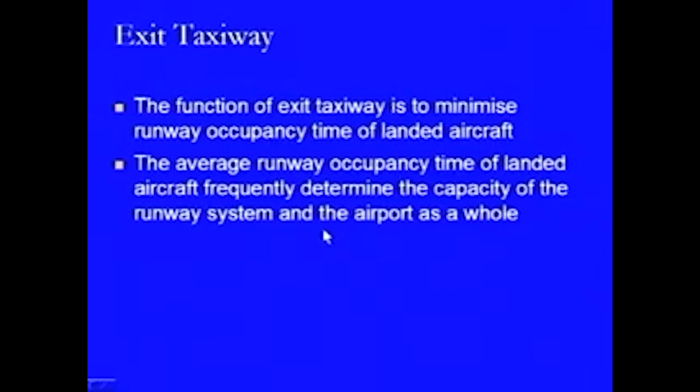The average runway occupancy time of any landed aircraft frequently determines the capacity of the runway system, and not only the runway system, but also the overall capacity of any airport. This is obvious, because if an aircraft takes more time at landing before reaching the terminal apron, no other operation can take place on that runway strip. This reduces the overall capacity of not only the runway strip but also of the airport. That is why average runway occupancy time is an important factor, and it must be measured and optimized to be as minimum as possible.

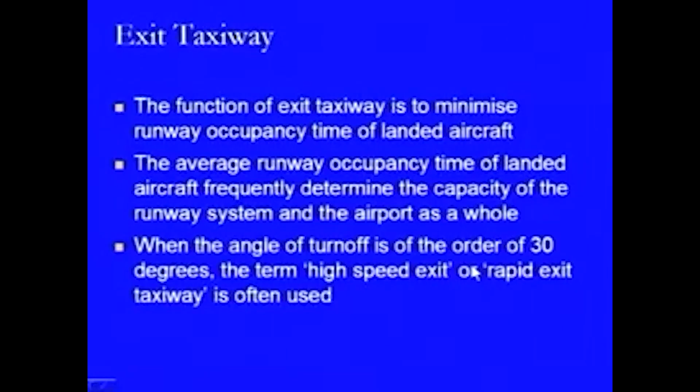When the angle of turnoff is of the order of 30 degrees, the term high speed exit or rapid exit taxiway is used. This depends on at what particular angle the exit taxiway is provided. If it is provided at an angle of around 30 degrees, the turn can be taken at higher speed, and that is why it is called a high speed exit or rapid exit taxiway.

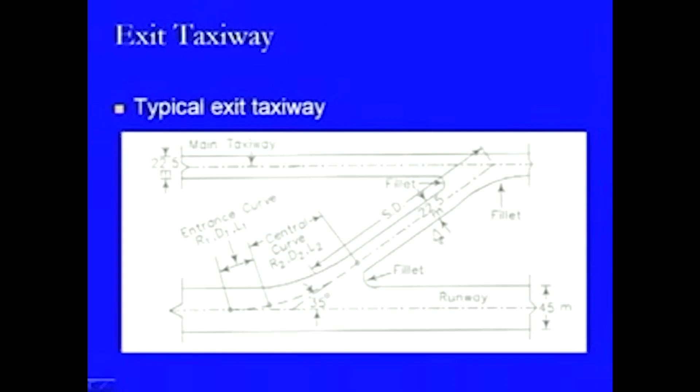So these are some design features which have significance in the design of any exit taxiway, and we will be looking at all these design features and the computation of these design parameters.

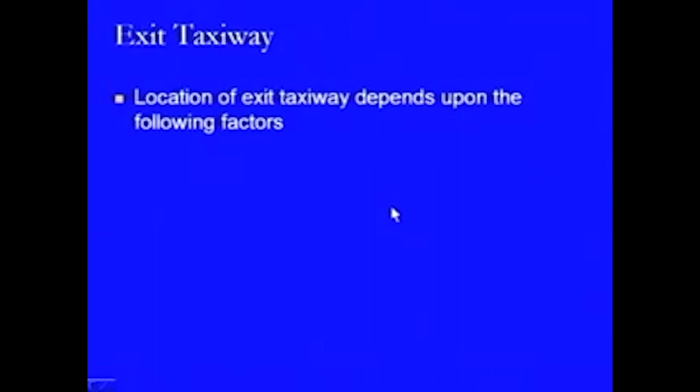Now we first look at the conditions which define the location of any exit taxiway. There are certain factors on which this may depend, such as for large and small aircraft we may require different initial exit speeds. That is one particular condition known to us.

This depends on the type of propulsion power provided on any aircraft. If the aircraft is big enough, the power will be more, and therefore the speed with which it will be landing will be more compared to smaller aircraft. Therefore, we have to look at the exit speed of different types of aircraft which will be using that airport and the exit taxiway.

Then there is a touchdown distance at which the aircraft will be touching the pavement surface when it is coming along the flight path and descending on the runway strip. This touchdown distance from the runway threshold and the runway occupancy time both need to be determined, and they will be dependent on the approach speed with which it is crossing the threshold and the touchdown speed. These are the two values which are the important factors defining for how much time period an aircraft is going to remain on the runway strip.

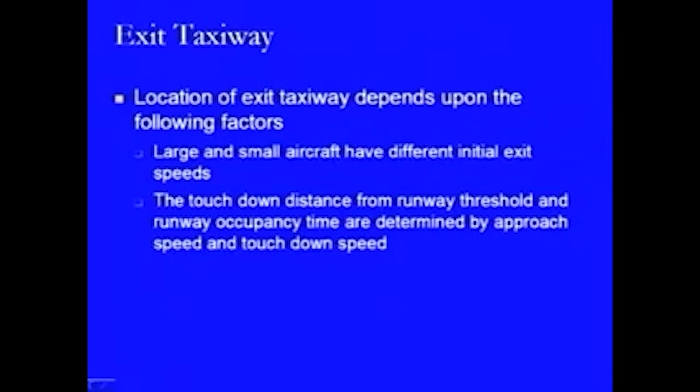If the aircraft is crossing the runway threshold with a smaller speed, then it will be touching down a little early, or may touch down at the pre-specified point, but then it will be coming towards the exit taxiway location with a smaller speed, and therefore there is more occupancy time in this case. Whereas an aircraft coming with a higher speed at touchdown will be moving with that same higher speed, and therefore the occupancy time will remain lesser. So that is another design parameter which creates its effect on occupancy time.

Then another factor is the rate of deceleration, which is also dependent on certain parameters like the pavement surface condition. Within this, it may be a possibility that it is in wet condition or dry condition. On both these conditions, it has a different coefficient of friction which creates this effect at the time the aircraft is trying to decelerate, as the pavement surface provides some resistance in the opposite direction. Obviously, in the dry condition, the coefficient of friction will be more compared to the wet condition, so in that case the rate of deceleration will be more, and the aircraft can be brought to a desired smaller speed earlier compared to a wet condition.

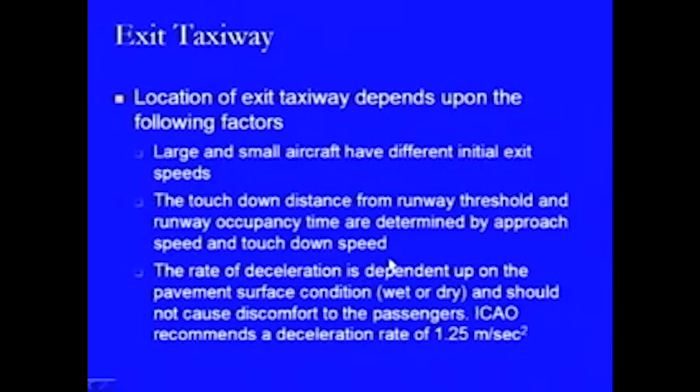Further, there is another factor - the size of the airport. If there is a large airport, there may be as many as 3 angled exit taxiways for each landing direction, in addition to several 90-degree exit taxiways. So it depends - if it is going to be used by a large number of aircraft with much more frequency of landing, then we require a number of taxiways, and these exit taxiways may be angled taxiways and 90-degree taxiways provided together. So that is a combination which needs to be provided.

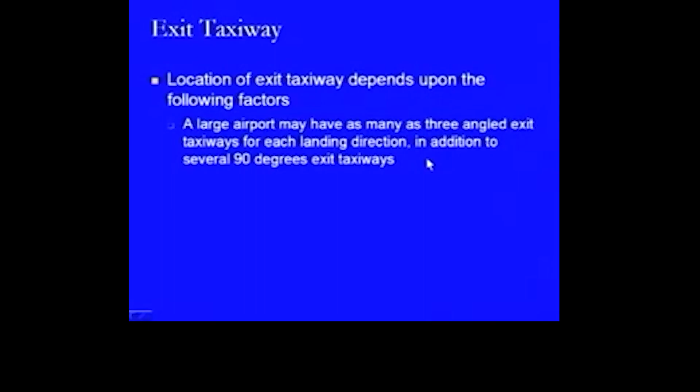What it says is that other than the 90-degree exit taxiways provided, there should be 3 angled taxiways for each landing direction. Now, the 3 angled taxiways will be spaced at different distances along the runway strip, so that they can take care of different types of aircraft with respect to the propulsive power with them, and the efficiency or rapidity with which those aircraft can be taken away from the runway strip towards the main taxiways.

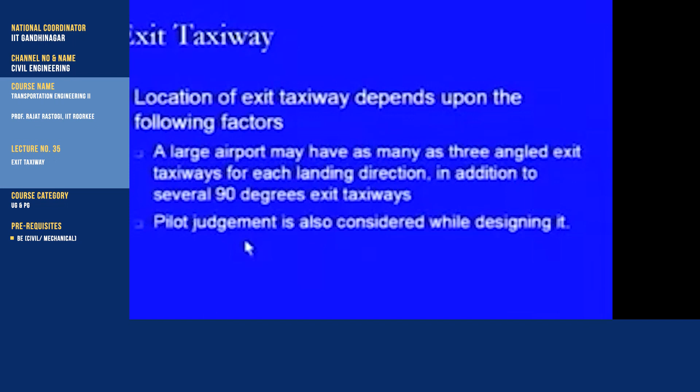While designing or locating these exit taxiways, another factor taken into consideration is pilot judgment. At times the pilot judges by themselves that they have reached a speed by which they can now take a turn and move towards the taxiway. So after what particular time interval that is being felt, on the basis of that the exit taxiway can also be located along the runway strip.

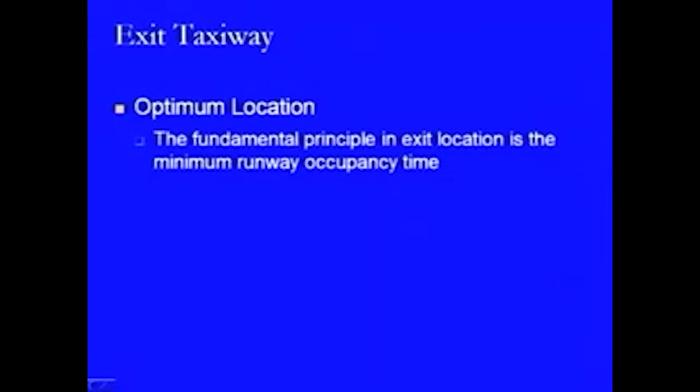Now, once we are talking about the location of any exit taxiway along the runway strip, one thing which can be looked upon is the optimum location of that exit taxiway. In this case, the fundamental principle remains that it should have the minimum runway occupancy time, as we have discussed before. The runway should be occupied for as less time as possible per landing, so that remains the fundamental principle.

So we have to locate it such that delays are not there. Further, it is dependent upon the acceptance rate of the runway with the taxiway system and the arrival rate of aircraft. These are some other factors which govern whether we are having the optimum location or not.

What it tries to say is that there are two things happening. One is that the runway system is having the arrival rate of the aircrafts. On the basis of the number of aircrafts which are going to land at that airport, there will be a specified arrival rate at which these aircrafts will be coming.

And then there is another rate known as the acceptance rate of that runway. Acceptance rate means whether the runway is in a position to take an aircraft approaching this airport, and this depends on the overall capacity of the airport and the provision of taxiways by which the runway becomes empty. When there is no other aircraft on the runway strip, then the next aircraft can utilize it for landing.

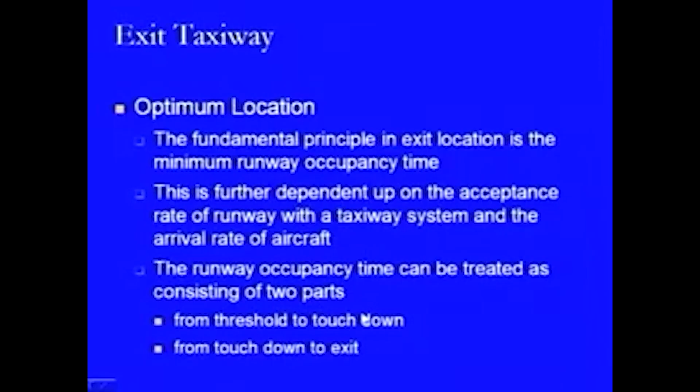This is controlled by the speed with which the aircraft is crossing the threshold, and also by the touchdown speed and the speed of exit. So these are the two speeds, that is, speed from threshold to touchdown. We will be taking three speeds into consideration in that sense.

So if we want to compute the distance from the runway threshold to the exit speed condition, it will be given by SE, the distance for the exit condition or distance for the exit taxiway, equals STD, where STD is the aircraft touchdown distance - that is, once it has crossed the threshold and touches the pavement at some point, the distance covered between those two points - plus VTD squared minus VE squared, divided by 2A.

Here VTD is the aircraft touchdown speed, the speed at which it is touching down the pavement surface, and VE is the aircraft exit speed at which it is coming out of the runway strip. And A is the average runway deceleration rate from touchdown to the exit speed.

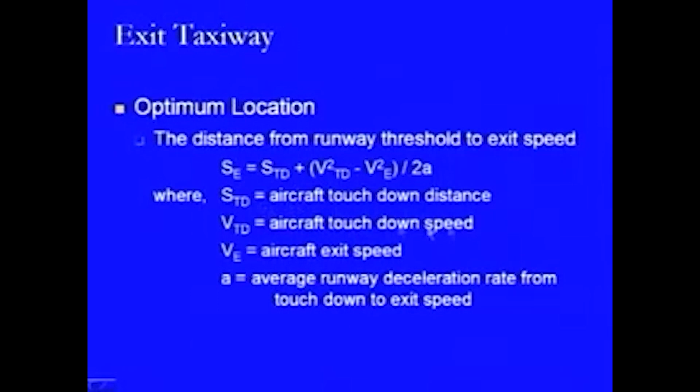On the basis of this value, the aircraft touchdown distance is known most of the time, because it is defined that for this type of aircraft it is going to touch at this position based on its flight path and based on its speed crossing the threshold. So this is generally known, and this value can be taken directly. Otherwise, this can also be computed on the basis of the speed of the aircraft at the threshold point and the speed of the aircraft at the touchdown point. With respect to those two speeds, we can compute the value.

This occupancy time, which we have been discussing, from the runway threshold to exit speed consists of the flight time from the runway threshold to touchdown point. Previously we saw the distance being moved, which is the overall distance required for locating the exit taxiway. After reaching that particular distance, the exit taxiway can be provided at that location, which will probably be the optimum location for that aircraft.

Another thing we are interested in is minimizing the occupancy time, and in that sense it is going to consist of the flight time from the runway threshold to the touchdown point. That is the one aspect, as we have discussed.

Another thing is the time required for the nose gear to make contact with the pavement surface. When the aircraft touches down, it is the main gears, provided below the wings, that touch the ground first. Once they have touched the ground, slowly the nose gear touches the ground. So there is some gap in this whole movement, and this is usually 3 seconds.

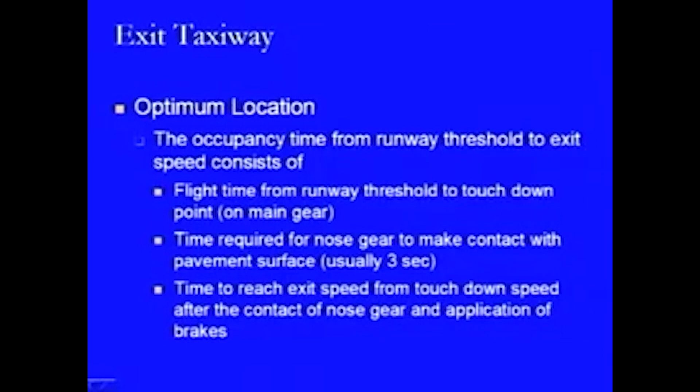So we have to take this 3 seconds into consideration, and then there is a time to reach the exit speed from the touchdown speed. There is a change from touchdown speed to exit speed, where the exit speed is lower than the touchdown speed, and that happens after the nose gear has contacted the pavement surface and the brakes have started being applied. So we are looking at this changeover.

Another is the time required for the aircraft to turn off onto the exit taxiway and clear the runway, approximately taken as 10 seconds. So we have two constant values, 3 seconds and 10 seconds, and in between those we have certain time periods which need to be computed on the basis of the speeds.

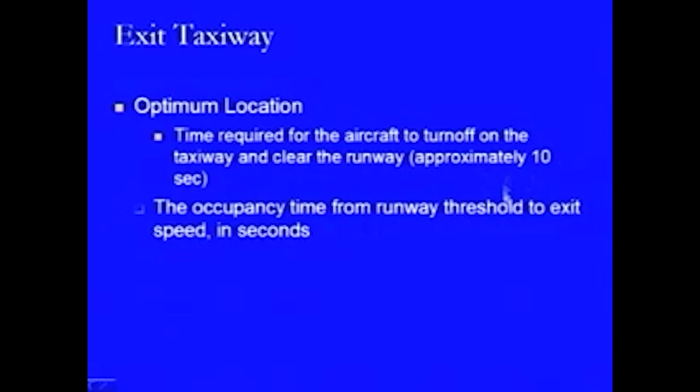Therefore, this runway time from runway threshold to exit speed, in seconds, can be given by: occupancy time equals STD divided by half of VTH plus VTD,

and this whole is being added to 3 seconds, the time taken by the nose gear to touch the pavement surface, plus the change in speed from touchdown to exit, that is VTD minus VE divided by A, the deceleration rate, because the brakes are being applied so as to reach this value of VE, plus 10 seconds given so that the aircraft can take a turn, turn off, and come towards the taxiway.

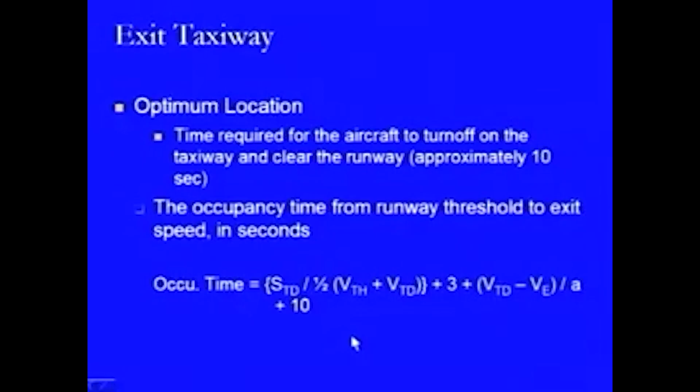So that is the overall time period to be considered, and this time is the occupancy time of any runway strip, and this needs to be minimized.

Now we are looking at the concept of optimum location, which, when we were discussing the various factors earlier, we came across two different types of rates that govern how we can find the optimum location: the average occupancy rate, acceptance rate, and arrival rate. The arrival rate is the rate at which aircrafts are reaching any airport, and the acceptance rate relates to the runway strip and its ability to accept the aircraft for landing.

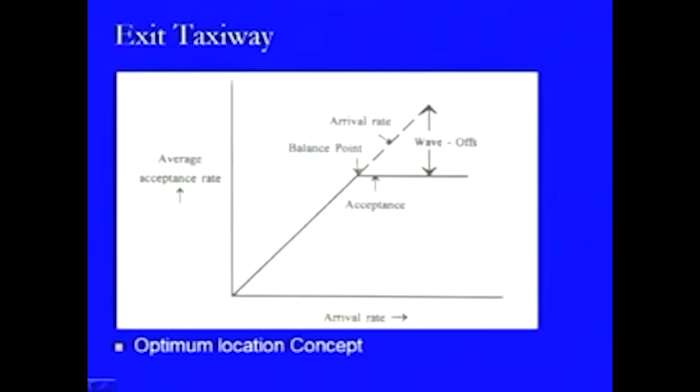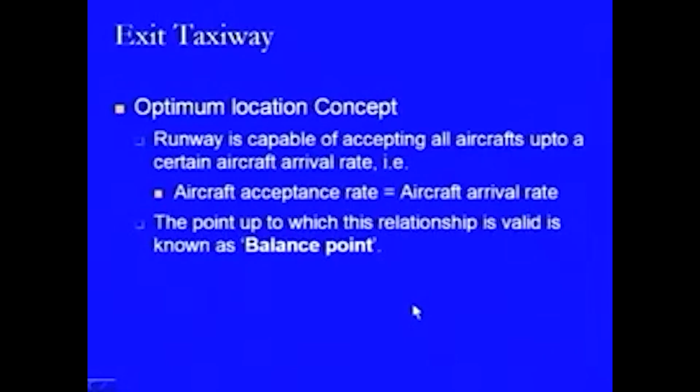If the runway is capable of accepting all the aircrafts up to a certain arrival rate, that is, if these two rates are the same, then this particular point up to which this relationship becomes valid is known as the balance point. We have already seen this in the figure.

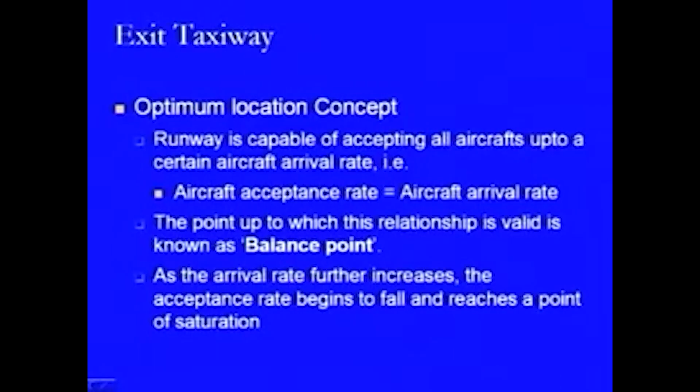As the arrival rate further increases, the acceptance rate begins to fall and it reaches a point of saturation. After this point of saturation, whatever aircrafts are coming need to be waved off. Wave off is the condition when the aircraft arriving at an airport does not complete landing because the runway is occupied at the time landing is to be made. This situation occurs at any airport, and happens a number of times when there are meteorological problems associated with that airport.

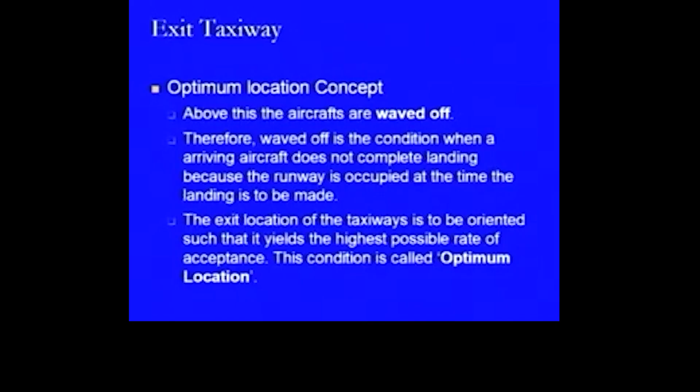The exit location of the taxiway is to be oriented such that it yields the highest possible rate of acceptance, and if we can orient it in this form, then this condition is known as the optimum location. That is how we can locate the optimum location of any exit taxiway.

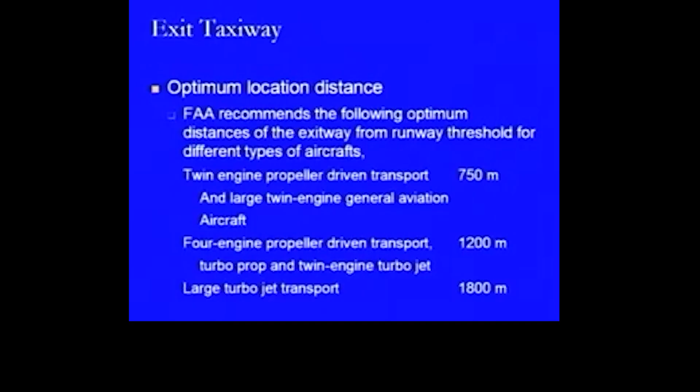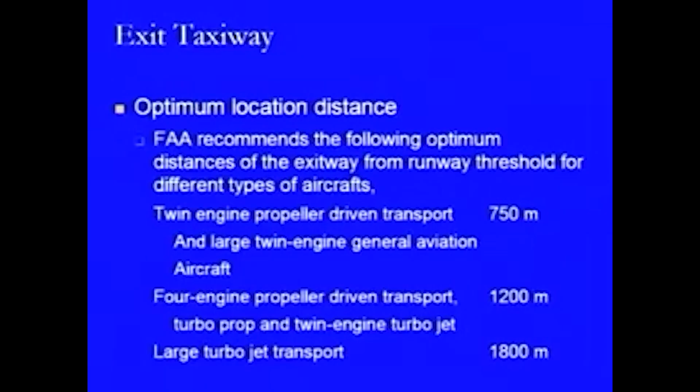Within this exit taxiway, FAA recommends optimum distances of the taxiway from the runway threshold depending on what type of aircraft uses the airport. For a twin engine propeller driven transport aircraft, or a large twin engine general aviation aircraft, the optimum distance of the exit taxiway from runway threshold as per FAA is 750 meters. For a 4 engine propeller driven transport aircraft, a turboprop, or a twin engine turbojet, it requires 1200 meters. For a large turbojet transport aircraft, it requires 1800 meters. So as the size and propulsive power of the aircraft keeps increasing, this distance also keeps increasing.

There are certain corrections which need to be provided for the optimum distance of any exit taxiway, and one such correction is for altitude and temperature. This is given by the equation: the corrected distance S_c equals S plus m, multiplied by 760 divided by p, further multiplied by 492 plus 1.8 times t, divided by 519, and then the value m is subtracted from the whole, that is minus m.

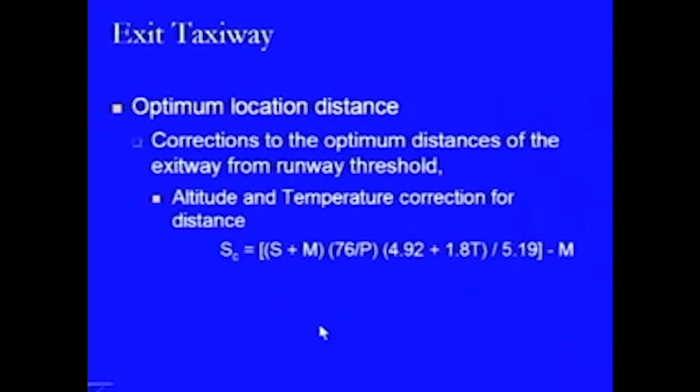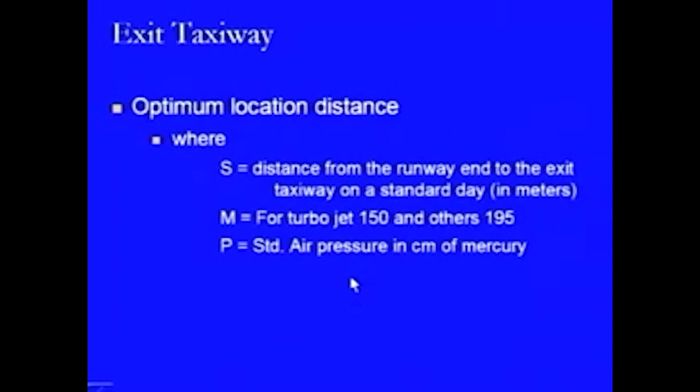Now, whatever abbreviations have been used here, we look at those: S is the distance from the runway end to the exit taxiway on a standard day in meters, m is 150 for turbojet, and for others it is 195. P is the standard air pressure in centimeters of mercury. T is the average temperature of the hottest month.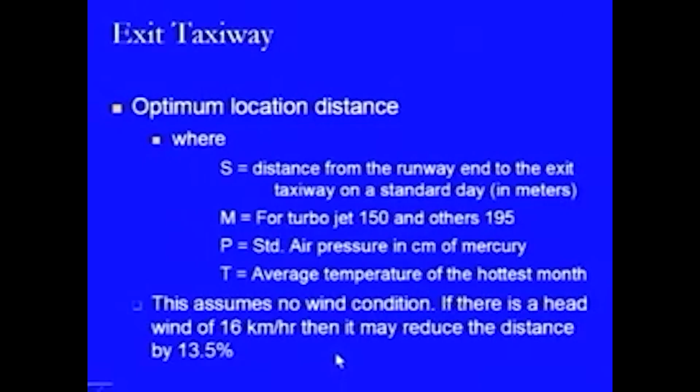This assumes there is no wind condition, meaning no wind blowing. If there is a headwind of 16 kilometers per hour, it has been observed experimentally that it may reduce the distance by 13.5%. So the effect of wind, if present, can be taken into account in this form.

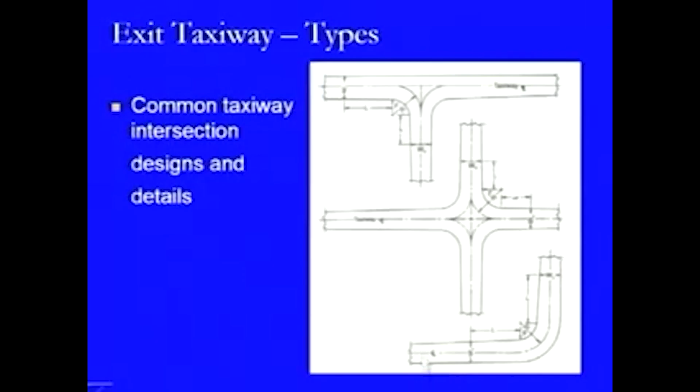Similarly, this is a condition where there is a crossing between a taxiway and an exit taxiway, taking the traffic further. So these two taxiways are crossing each other. All the figures have been shown here. Here it is in the form of an L taxiway, a sort of turning at the end of the runway strip, and that is how we can see the two type differences.

Now another thing related to the exit taxiway is its geometric values, and these geometric values are defined by the airplane design group. Here we see that the width ranges from 7.5 meters for design group category 1 to 30 meters for design group category 6, whereas the edge safety margin, again in meters, varies from 1.5 meters minimum to 6 meters maximum.

Then there is a center line radius which varies from 22.5 meters for category 1 to 51 meters for category 6. Length of the fillet also varies: initially it is 15 meters, then for category 3 it is 45 meters, and for the rest of the bigger categories it is 75 meters.

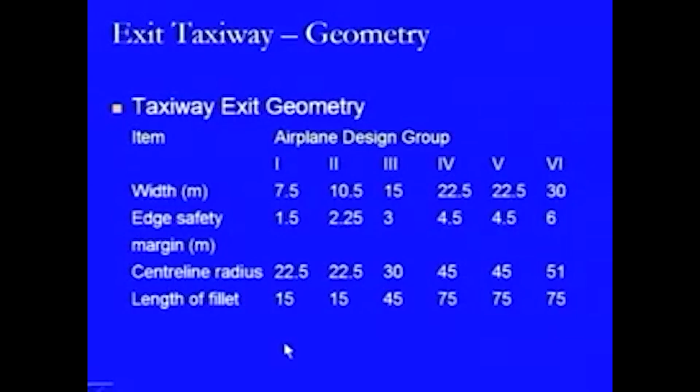Then there are some more things like the fillet radius, which can be computed based on the type of steering, such as judgmental oversteering. In a symmetrical condition it varies from 18.75 meters to 33 meters, for airplane design groups ranging from category 1 to category 6. Then if there is widening, in the case of one-side widening, it will be 18.75 meters to 30 meters. So there is some variation in these values, a small difference.

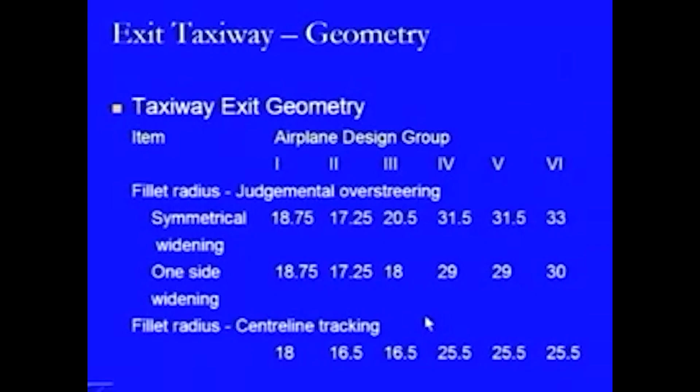And the fillet radius in the case of center line tracking, that is when the nose of the aircraft moves along the center line, varies from 18 meters to 25.5 meters.

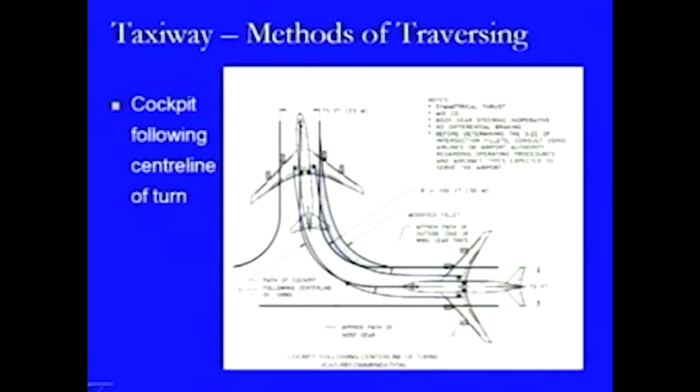So this is one method, also recommended by ICAO, whereas there is another method called judgmental oversteering. In this method, the nose does not go along the center line of the strip; instead it goes a little away, so that the inner wheel of the main gear remains well within the edge of the pavement surface. Therefore, a smaller size fillet is required when this type of method is used.

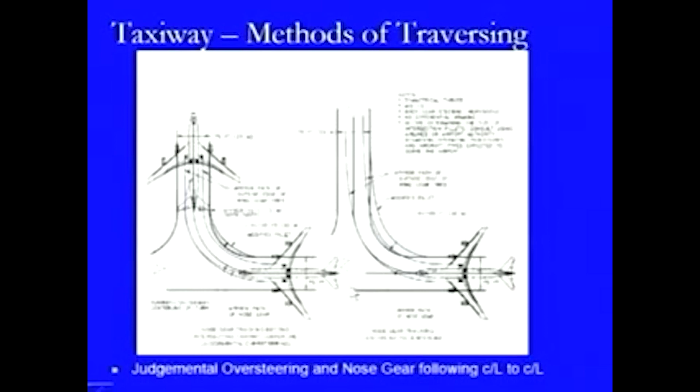The nose moves away slightly and comes back to position once the curve has been negotiated. Here there is no tilting of the aircraft, and it remains within the same central position. So that is another type of condition.

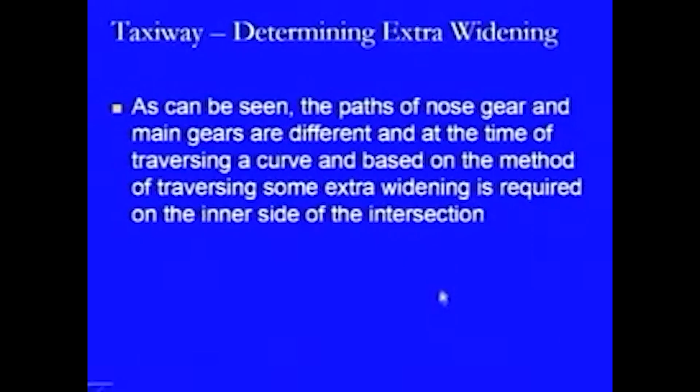In these cases we have to determine by what particular value the extra widening needs to be provided, or the fillet area needs to be provided. We have seen that the paths of the nose gear and main gears are different, and at the time of traversing a curve, some extra widening is required on the inner side of the intersection.

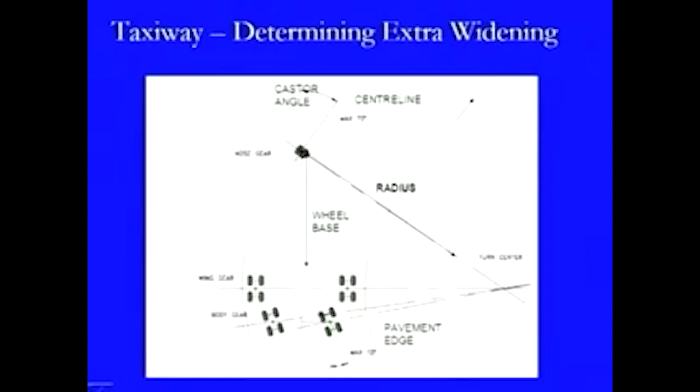We will be using this wheel base to determine at what particular position the curve will be negotiated by the nose gear and the main gear. There is a graphical method for this. First we draw the path of the nose gear, defined as M1, N1... N for nose gear, M for main gear. Then we set our compass to represent the wheel base seen in the previous figure.

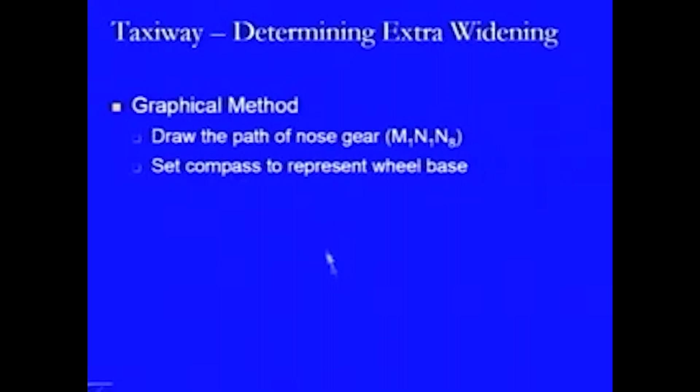Once we have this distance, we mark the initial position of the wheel base on any guiding line, say M1, N1. Whatever path we have from point M1, we take this same distance and mark a point on this curve, giving the M1, N1 position.

Then we come a little lower than M1, to a position M2 lying on the same curve, and mark another location N2, giving the M2, N2 location. We keep going this way, placing the compass at a short distance from M2 to mark N3, and keep repeating this process.

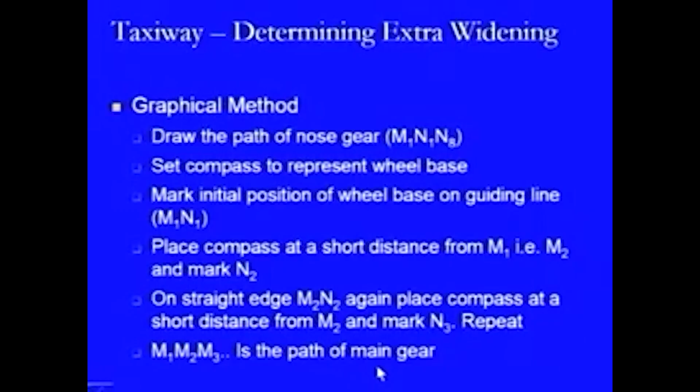Once we do this repeatedly, we get further locations of points M1, M2, M3, etc., and this particular line path will be known as the path of the main gear. That is how we can find out how the paths differentiate.

In this diagram, this is M1, this is N1, and this is N8. This is the guiding line, or the line along which the nose wheel will be moving. The wheel base is equivalent to M1, N1. We have taken a point M1 here, and with the help of the compass we have located point N1.

Once this is done, we come short of M1 and take a point M2, cutting it so that we get another point N2 at some distance, lying on this same line. We keep going this way, marking points on this side, such that the distance from M8 to N8 remains equivalent to the wheel base. The path we get in this form is the midpoint of the main gear path.

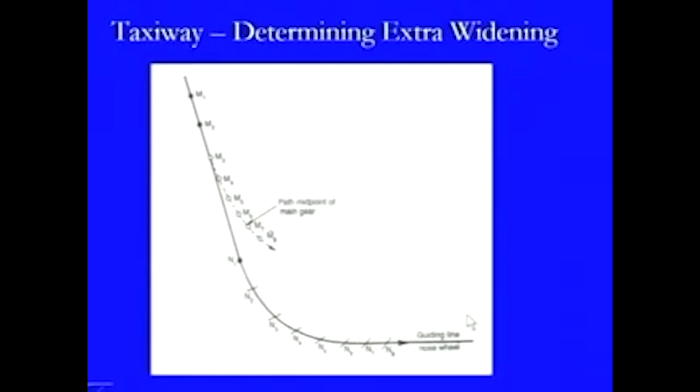Now we come to the design of the taxiway, and there are certain principles which govern that design. In the case of a small aircraft, the turn off exit speed is taken as 65 kilometers per hour at an exit taxiway angle of 45 degrees to the runway center line. Whereas in the case of large aircrafts, this turn speed at the exit is taken as 95 kilometers per hour, where the angle of intersection is taken as 30 degrees. So that is the rapid exit condition of the taxiway.

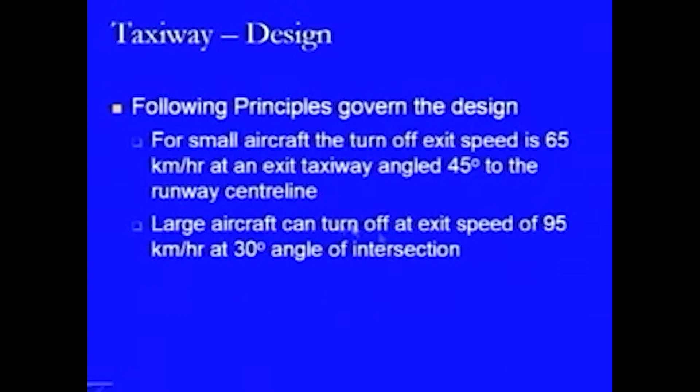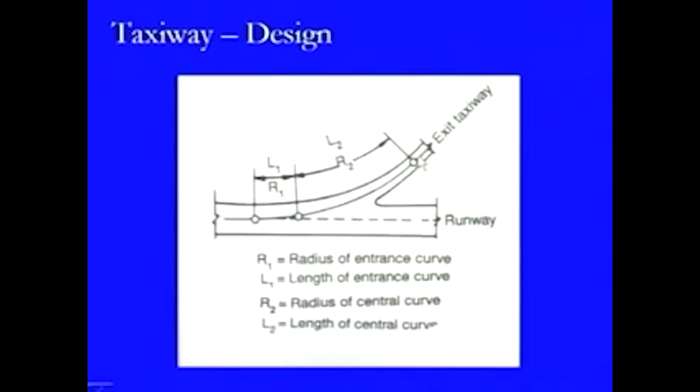This is a diagram which shows the components which we have to design, that is this is the runway. From this point it starts moving away from the runway strip, so this is the initial curve, that is L1 with the radius R1. Then there is another central curve which is having a length L2 and radius R2, and it goes in this form, and then after this again it will become a straight line.

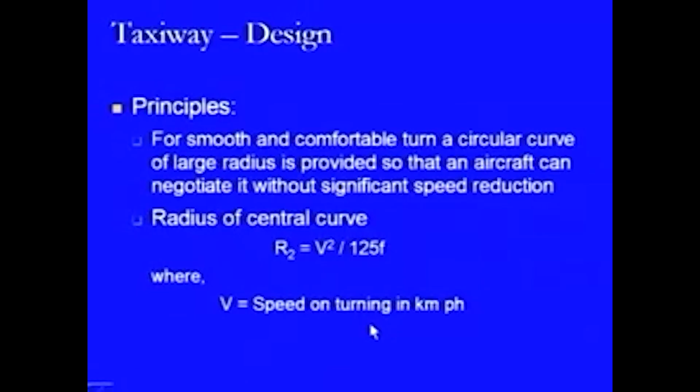Now another thing is that for a smooth and comfortable turn, a circular curve of large radius is provided, so that an aircraft can negotiate it without significant speed reduction. That is the central curve with length L2 and radius R2, and the radius of this one can be found out by a formula V squared divided by 125F, where V is the speed on turning in kilometers per hour, that is the speed with which it is taking a turn or exiting, and F is the friction factor. Usually this friction factor is taken as 0.13.

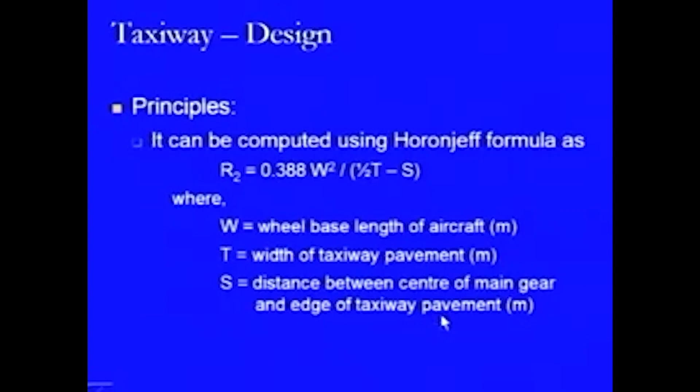And then this R2 value can also be computed by using the Horonjeff formula, which is 0.388 W squared, divided by half of T minus S, where W is the wheel base length of the aircraft in meters, T is the width of taxiway pavement in meters, and S is the distance between center of main gear and edge of taxiway pavement, again in meters.

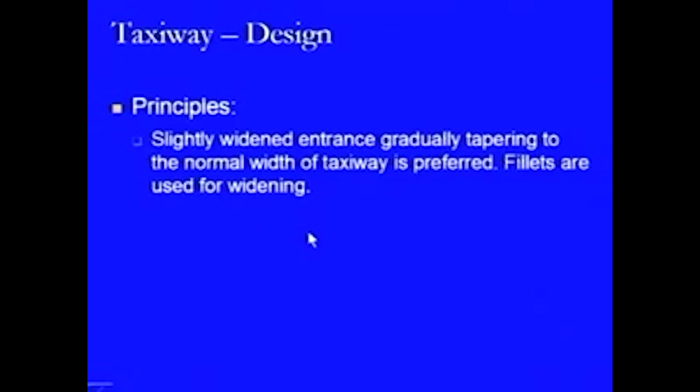Now there is a slightly widening entrance which is provided, which is gradually tapering to the normal width of the taxiway, and this is preferred, and the fillets are also used for widening. In the case of this, a compound curve is provided, then it reduces the wear on the nose gear, and it is relatively easier to lay in the field.

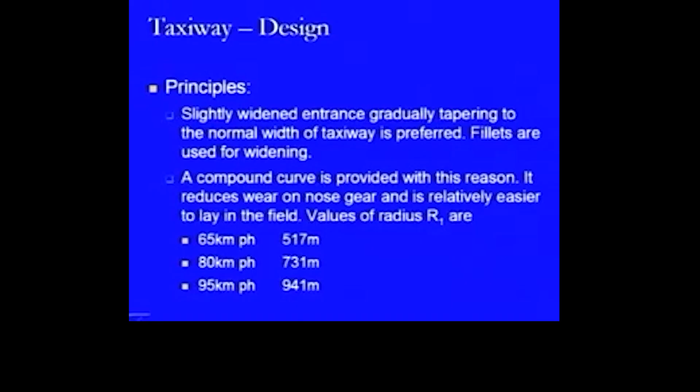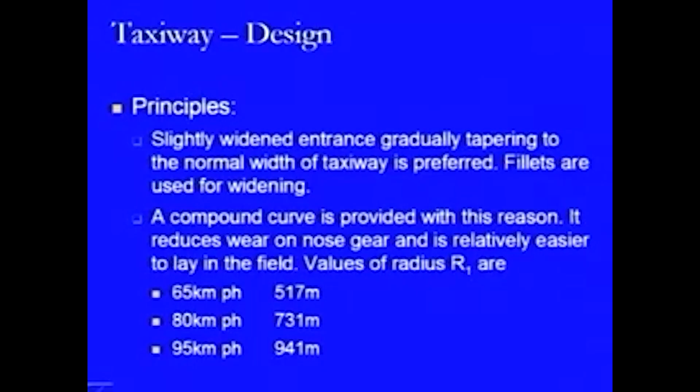Now the length of entrance curve is estimated as L1, and this is V cubed divided by 45.5 C multiplied with R2. Here V is the aircraft exit speed, R2 is as computed previously, that is the radius of the central curve, and C is the factor which is normally taken as 0.39.

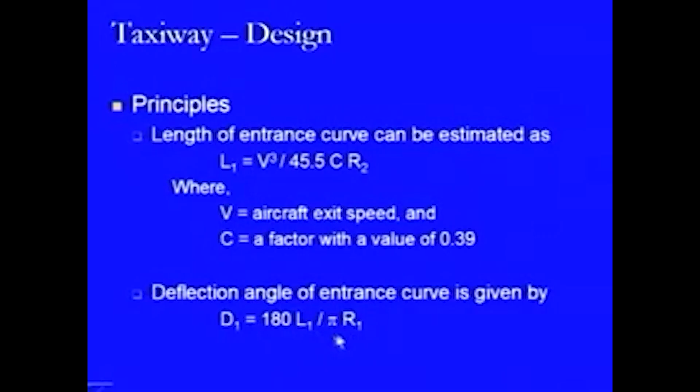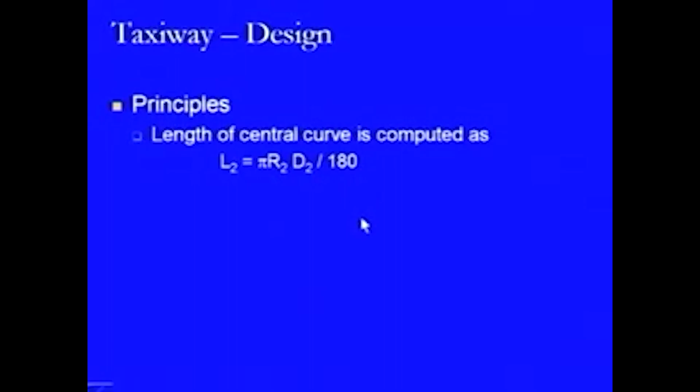Now the deflection angle for the entrance curve, that is for the initial curve of the compound curve, is D1, and this can be computed as given by this formula: 180 into L1 divided by pi into R1. We know R1, we know L1, so we can compute the value of D1. Now the length of the central curve is computed by the formula pi into R2 into D2 divided by 180. So these are all on the basis of the properties of the circular curve only.

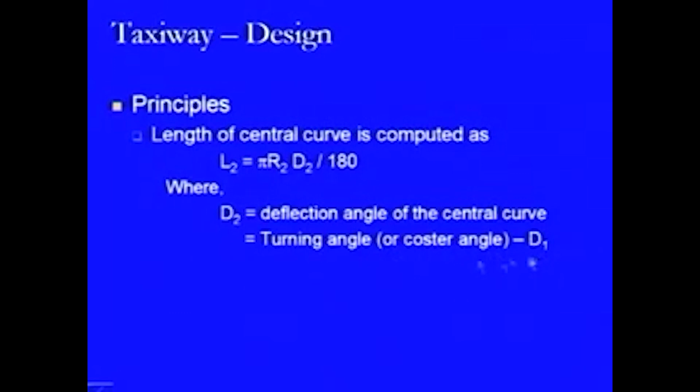Now D2 is the deflection angle of the central curve, and this can be computed by taking the coster angle, or the turning angle, and subtracting D1 from this value. R2 is the radius of the central curve.

Then there is a stop distance which needs to be provided, and this defines the stopping distance basically, because this is the point up to which the aircraft can be stopped without any accident taking place. So this governs the comfortable deceleration rate with which the aircraft is decelerating and leaving the runway strip, and this can be computed by the equation shown here.

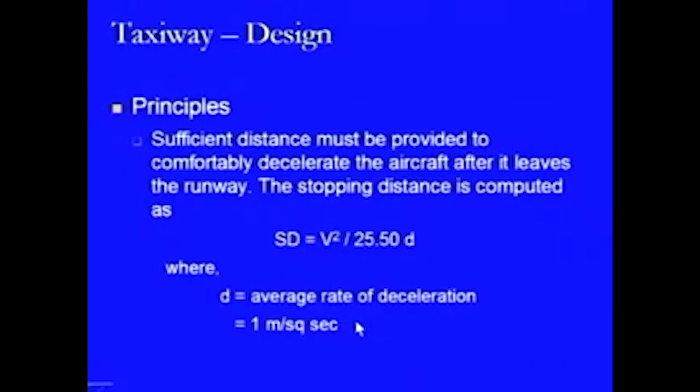The equation is SD equals v square divided by 25.50 multiplied with d, where this d is the average rate of deceleration, and if it is not known, it is generally taken as 1 meter per square second. In the case of ICAO, it is defined as 1.25 meter per square second.

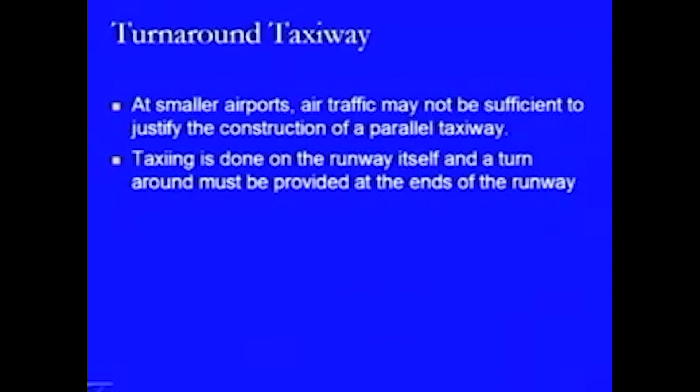Now, in the case of smaller airports, the air traffic may not be sufficient to justify the construction of parallel taxiways. So in those cases, what we provide is the turnaround taxiway, where the taxiing is done on the runway itself, and a turnaround is provided at the end of the runway strip. That is the condition termed as the turnaround taxiway.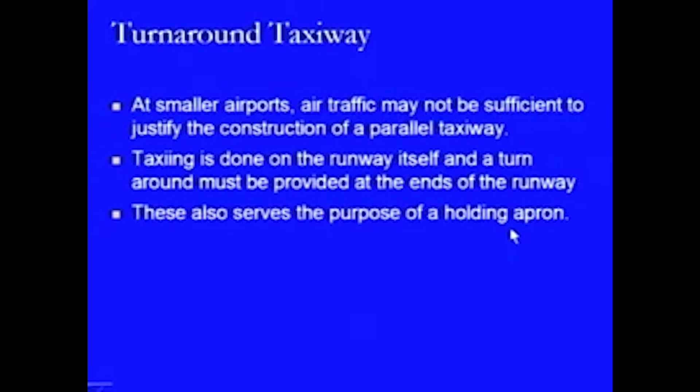These also serve the purpose of a holding apron, which is a type of apron to be provided, which we will discuss in coming lectures. But what we can understand here is that it provides the condition where an aircraft can be stored for some time period if there is an emergency. So that is what a holding apron is, and it also helps in that way, that it can be used as a holding apron.

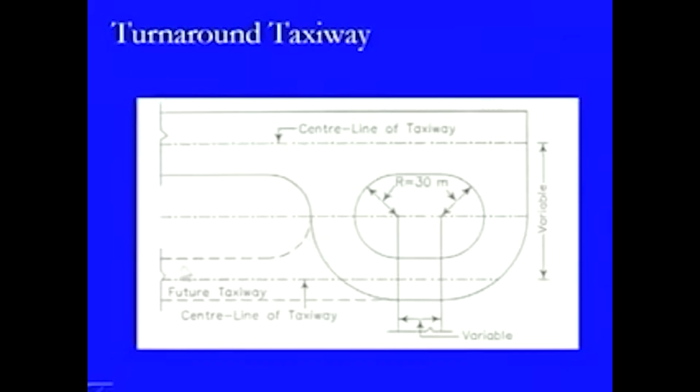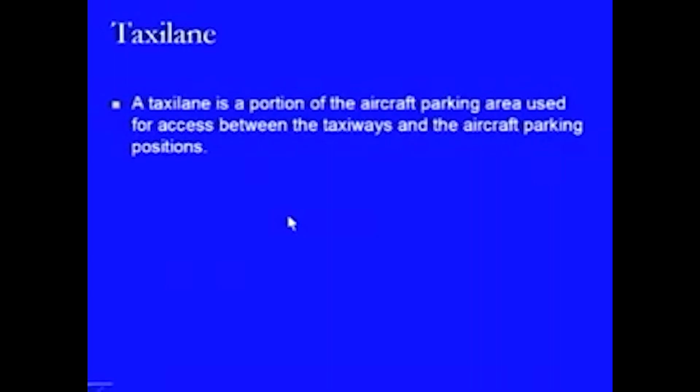The another type of feature is the taxi lane. In the case of taxi lane, this is a portion of the aircraft parking area being used for access between the taxiways and the aircraft parking position. That is how it is defined.

As we understand, in the case of terminal buildings, the aircrafts will be standing just in front of the terminal buildings, and if a similar condition exists with parking of aircrafts on the other side, then in between these two types of parkings there will be some pathway, and that pathway is termed as taxi lane, which provides the connectivity and the area through which the aircrafts can move and access either the parking area or the terminal building, or move towards the taxiways.

As far as ICAO is concerned, it defines this taxi lane as an aircraft stand taxi lane, as a portion of the apron intended to provide access only to the aircraft stands. That is how it defines it. It simply speaks about the aircraft stands to which the aircraft will be moving, and whatever portion of the taxi lane is used for that purpose is the taxi lane.

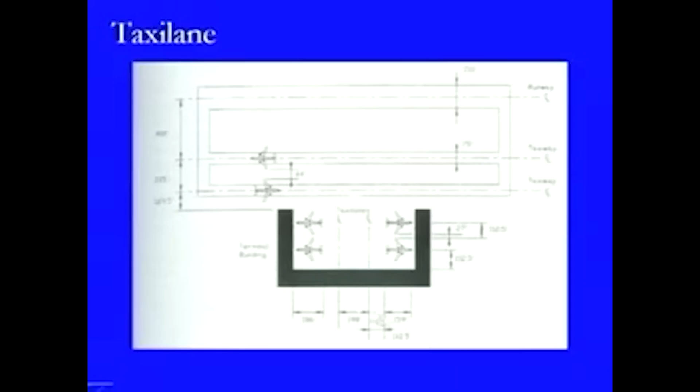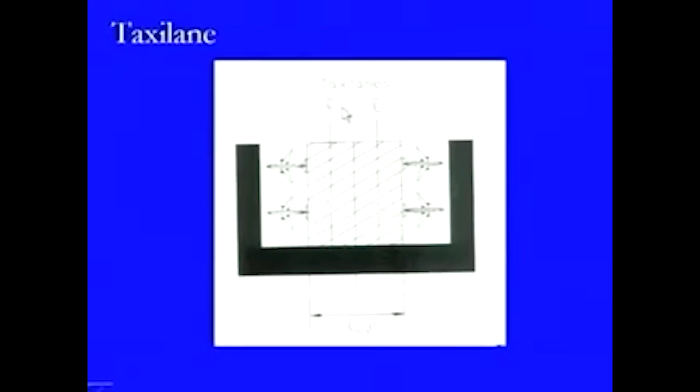This is another close up of the same condition, where we have two taxi lanes being provided with their center lines like this.

So, in designing this taxi lane, we need to consider that the minimum taxiway center line to taxi lane center line separation is provided as 1.2 times the wingspan of the most demanding aircraft plus 3 meters. That is how we can compute the value between the two center lines.

Then the separation between the taxi lane center line and the parallel taxi lane center line, or a fixed or movable object in the terminal area, is predicated on a wing tip clearance of approximately half that required for an apron taxiway.

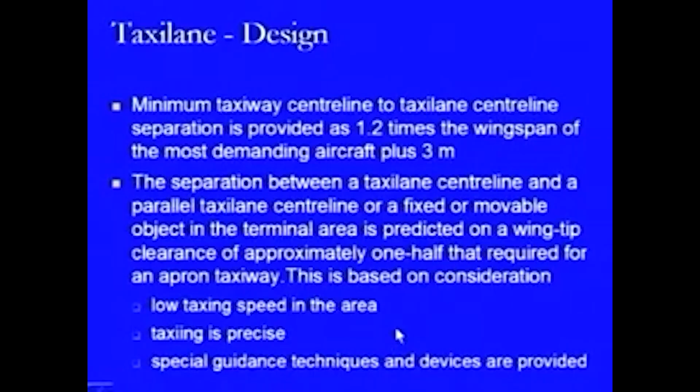So this is another thing to consider: we look at the distance provided in the case of apron taxiway, and the clearance provided between the taxi lane center line and the fixed or movable object in the terminal area is half of that distance. This value is dependent on the taxiing speed in the area, whether the taxiing is precise or not, and the special guidance techniques and devices provided for taxiing.

Further, a minimum separation between taxiway center lines of 1.1 times the wingspan of the most demanding aircraft plus 3 meters can be provided, though the desirable value, as we have seen previously, is 1.2 times the wingspan plus 3 meters. The separation between a taxi lane center line and a fixed or movable object is 0.6 times the wingspan of the most demanding aircraft plus 3 meters.

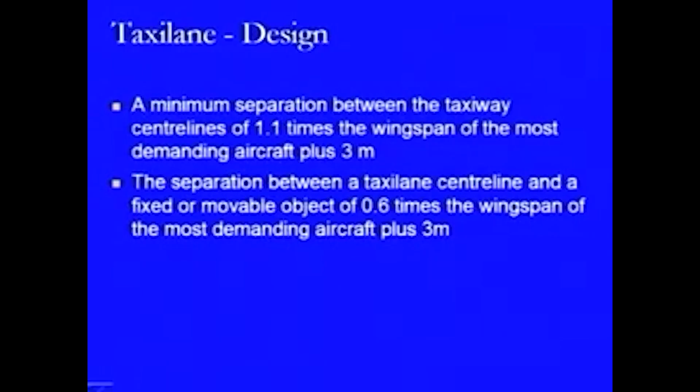So, everything is governed by the wingspan of the most demanding aircraft, or the biggest aircraft which is going to generally utilize that lane or that airport.

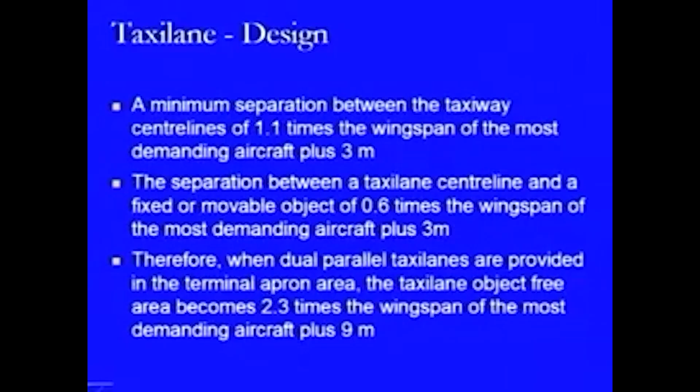Therefore, when dual parallel taxi lanes are provided in any terminal apron area, the taxi lane object free area becomes 2.3 times the wingspan of the most demanding aircraft plus 9 meters. That is the overall size of any dual parallel taxi lanes as shown previously. The 9 meters is taken as 3 meters on each of the two sides plus 3 meters in the center between the two aircraft, which is the clearance being provided as we have seen previously.

So, this is how we can design any of the taxi lanes. In today's lecture, we have seen how to design exit taxiways so as to improve airport capacity by reducing the occupancy time of any aircraft on the runway strip. We have also seen the various design factors influencing the occupancy time, as well as finding the optimal distance at which the exit taxiway needs to be located. Along with the exit taxiway, we have also seen their design principles and parameters in their computation, and we have looked at two specific conditions termed the taxi turnaround taxiway and the taxi lane.